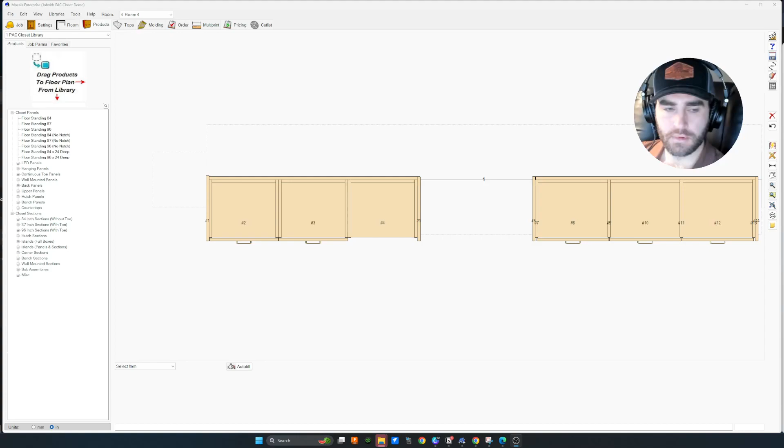Okay, so PAC Closet Library, we're going to do a double-sided island. This one we're looking at right now is a single-sided.

I'm just going to delete this regular end cap, and delete this other one.

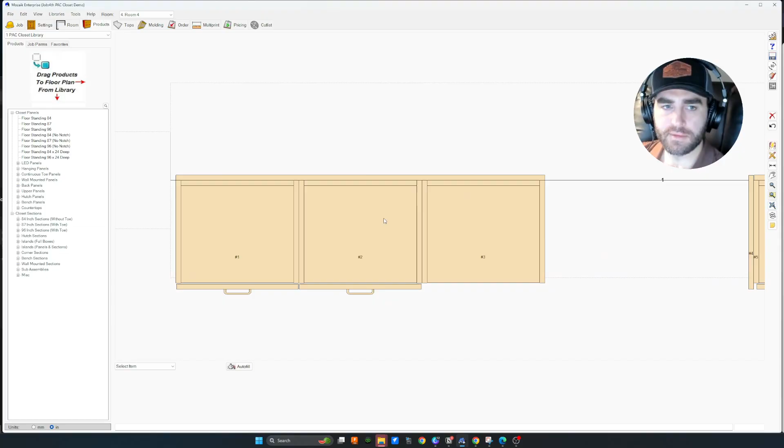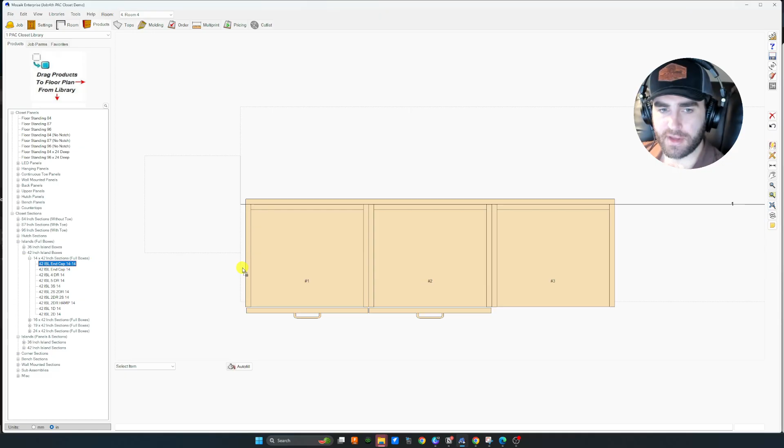Go into the panels, islands full boxes, 42 tall, 14 deep. So this is kind of cool. We have our regular end panel that we just deleted, and we have a double end panel, and it says end cap 1414. That means you're putting a 14 on the front and a 14 on the back.

And these are still modular depth if you need to manipulate them. I wouldn't, I would just pull out what you need from the products. If, let's say, you have a 14 on the front and a 16 on the back, not a big deal.

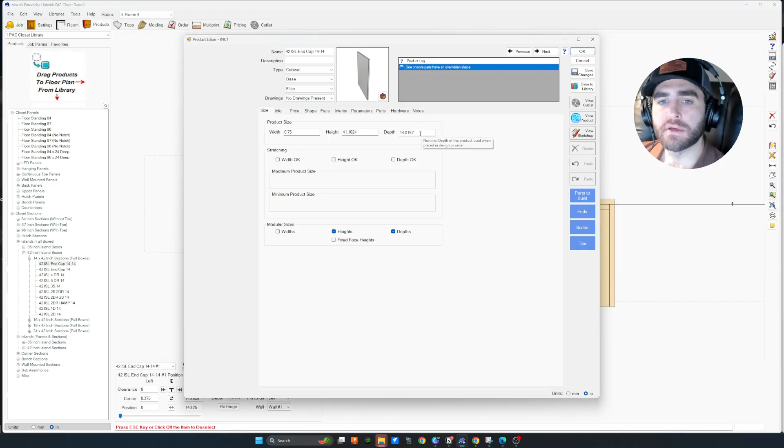We should actually do that. So the front is 14, but in parameters, we have this other rear section depth. And the answer for this, we're in inches now, so let's go to notes. And this is our 16-inch equivalent here.

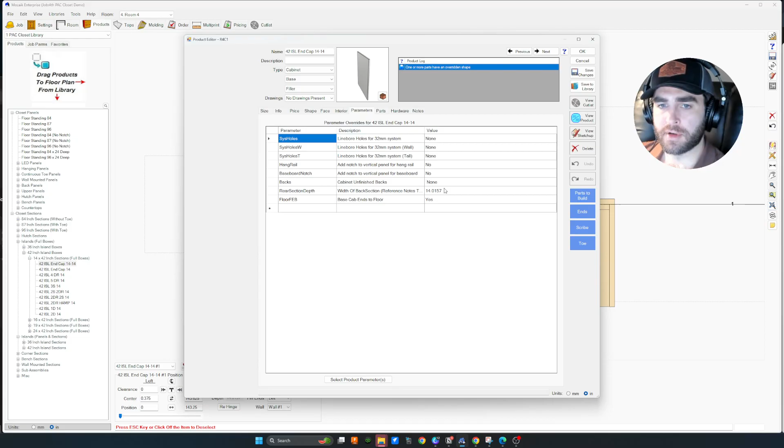I copy, go to parameters, I'll change this. And it extends the back out, so now we can put 16-inch sections back there.

So I'm going to close up the 14s, go into the 16s, and we need to have an end cap first. No, we don't, this is full boxes.

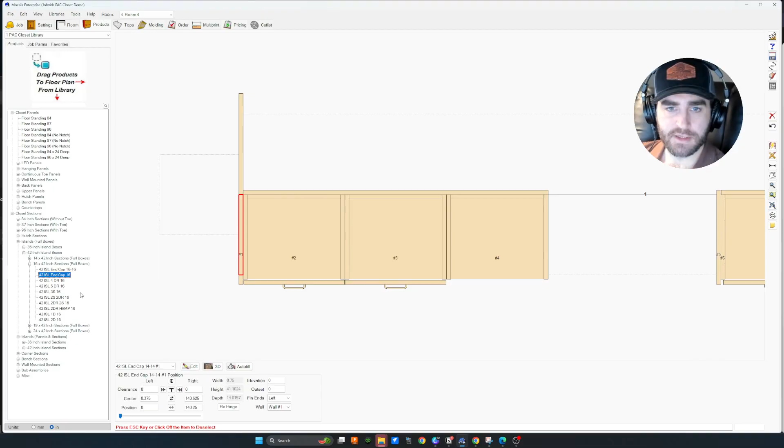So let's get rid of this end panel, or this back panel, because it's a double-sided island, so we don't need a back panel anymore. Delete that.

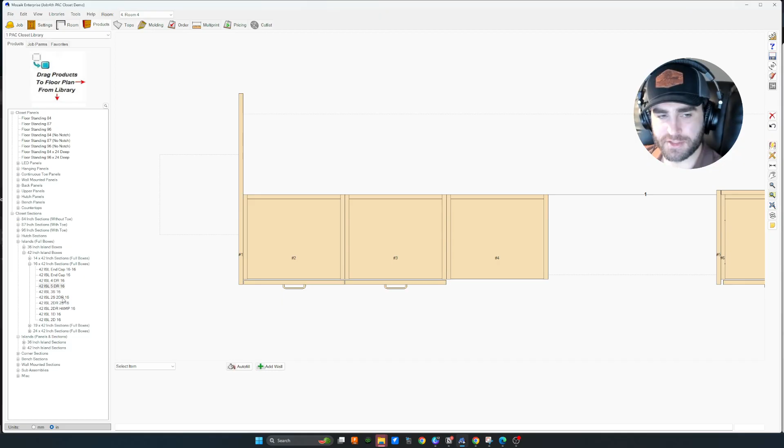All right, cool, so now we can just bring in our boxes. Now, this is the back side, right? The bounding box of this double panel is right here. So the back side's always going to be a little weird, but I'll show you how to make it pretty easy. So let's bring in a 2-shelf, 2-drawer.

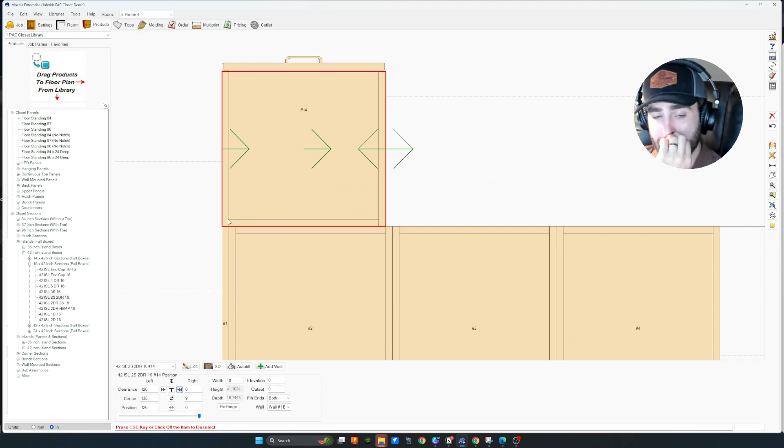Okay, so it always puts everything to the left. That's fine. I'll bump it over. And then you can see that it's overlapping this other panel. So to set that right, just go down to position and say 0.75. If you want to get technical, you can, but I think that's fine.

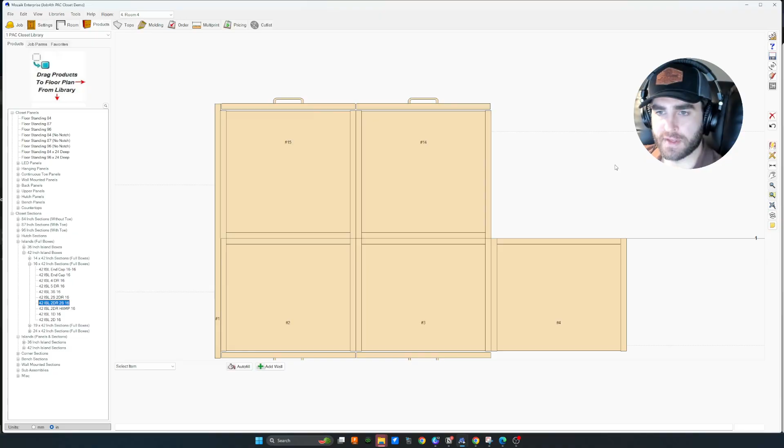And then now, everything else that I lay down in here, I'm just going to bump to the right. It'll fly right over for me. You could also have started with this cabinet here, or this end panel, and then done it like that. So, for instance, do this quick.

Let's pretend we already changed this. Put that here. Okay, now that this panel's here, oh, actually I'm a liar, you can't do that. Because there's no bounding box here, so it's all good.

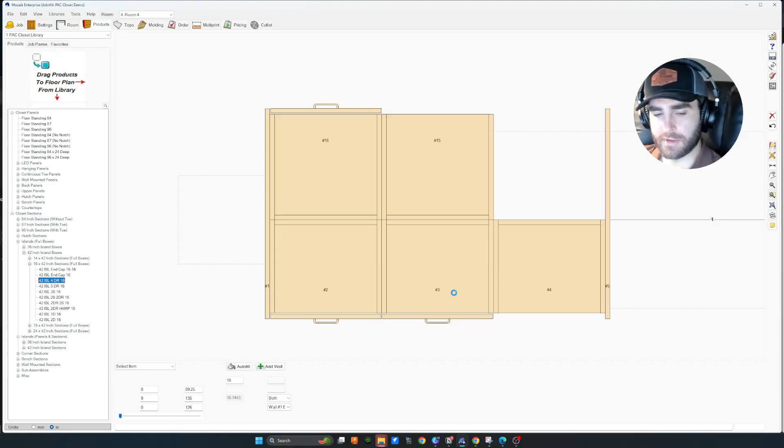Just bump it to the right. Put it in here, bump it to the right. There you go. And now you can see everything lines up as well, which is fantastic.

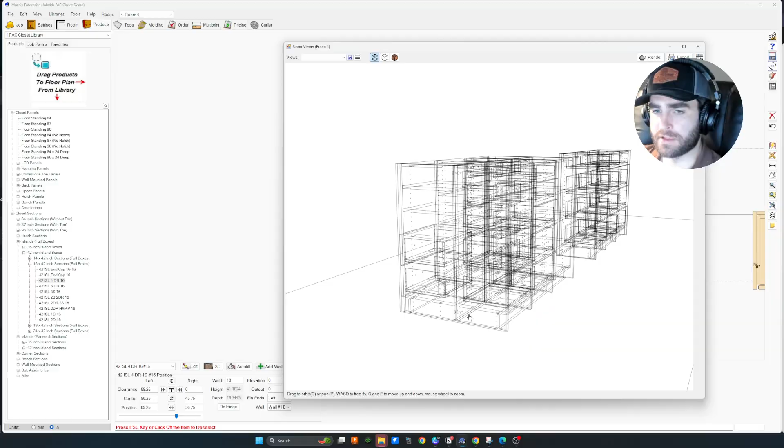Now we have a double-sided island. I mean, basically just ready to manufacture as long as you're okay with it not having Axilo legs. Watch the video on how to do job parms for the full box islands if you want to know how to bring your Axilo legs on.

Bring it out of wireframe hell. Okay, so now it's looking good.

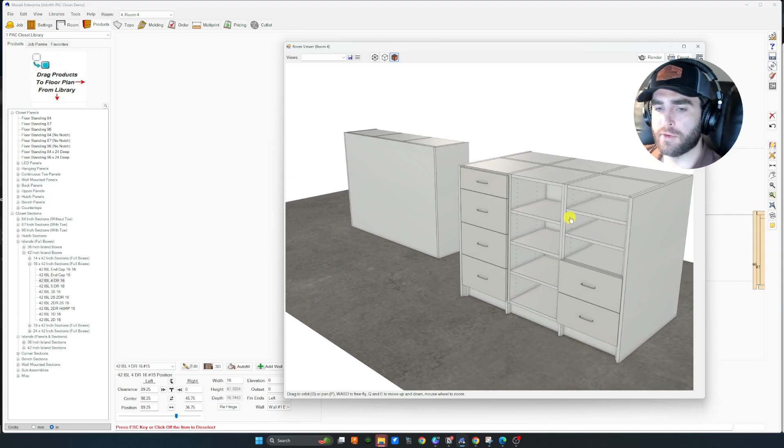Ready to go. Oh, one thing you will notice is that our edges are not notched for these. That you're probably going to want to do. So in each of these, you can go into ends, say notch front toe, just to notch those. So that does not come in automatically.

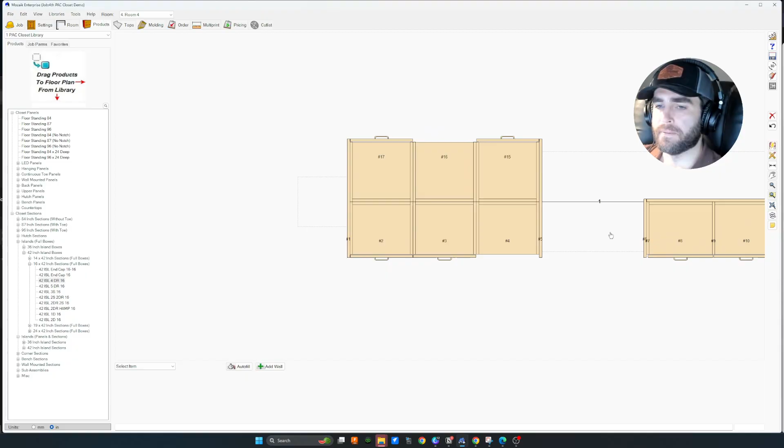All right, that's it for this video. And now we're going to move on to single panels and sections.